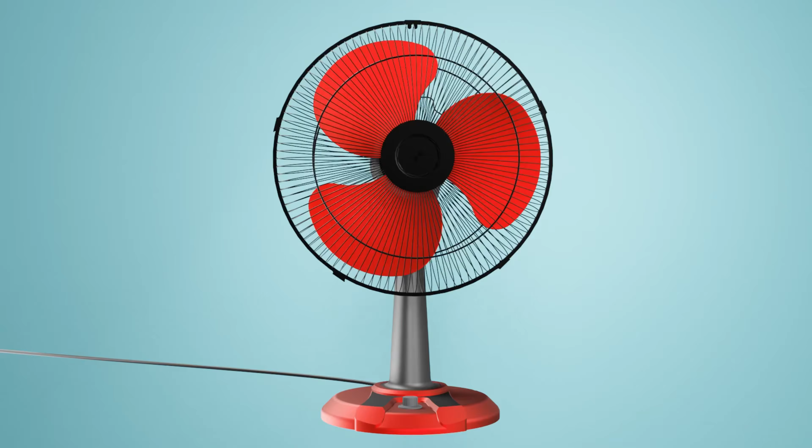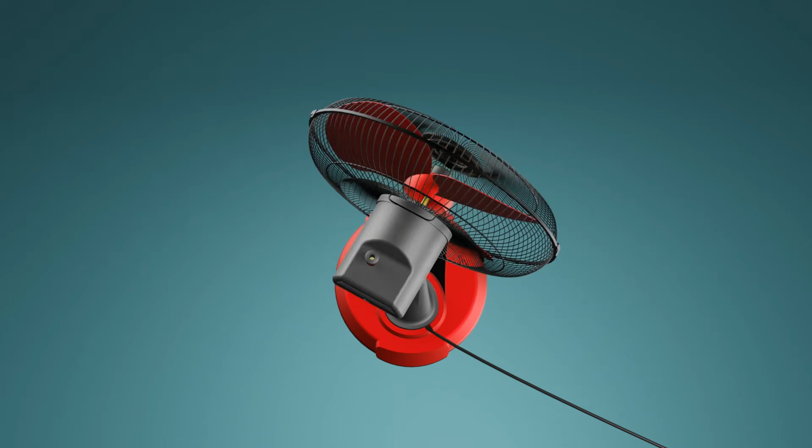Every household has a fan that rotates its head from side to side on a fixed base to distribute air across a wider area. Unlike stationary fans that blow air in a single fixed direction, oscillating models typically sweep through an arc, often 75 degrees to 90 degrees, to create more uniform airflow throughout a room.

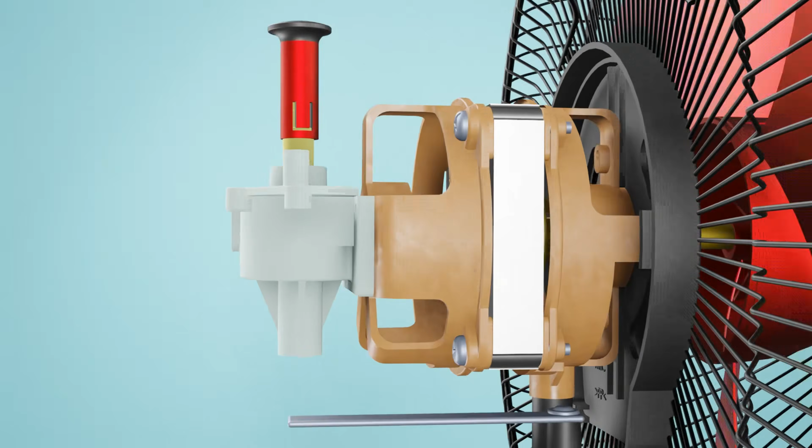An oscillating fan uses a single motor to both spin the blades and drive a side-to-side sweeping motion through a series of mechanical reductions. The main motor shaft has a spiral thread called a worm, located behind the fan blades. As the motor spins at high speed, this worm rotates with it, engaging a perpendicular worm gear inside a gearbox, the clutch mechanism known as the pull pin.

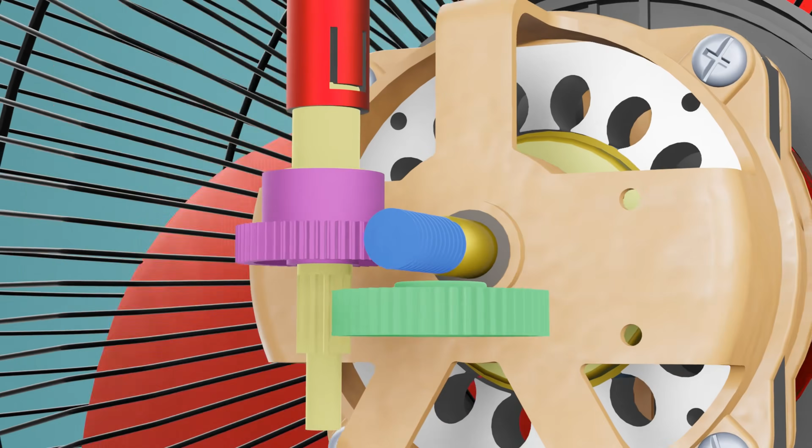When you press the oscillation pin down, you engage a secondary set of gears. This works in two states. Lock state: pressing the pin allows a spring-loaded mechanism, often using small ball bearings, to lock the worm gear's rotation to a central axle. Free state: pulling the pin up disengages these gears, allowing the motor to spin the blades without turning the oscillation machinery.

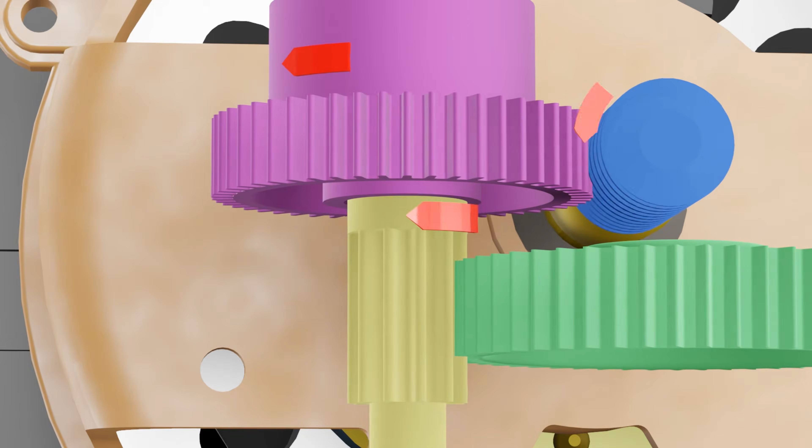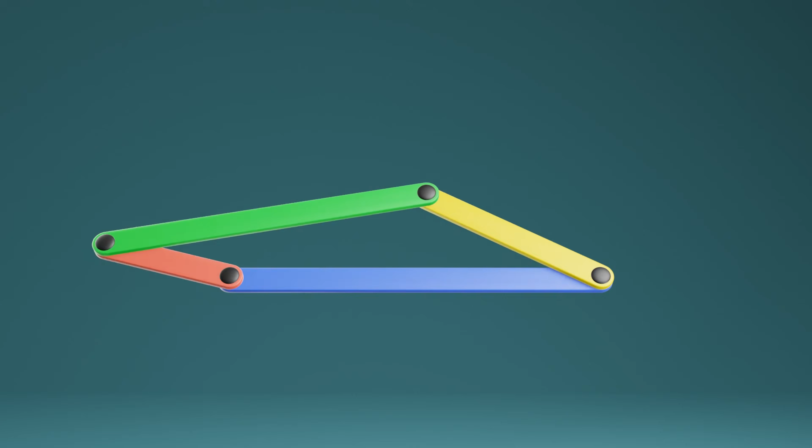This pull pin passes the motion through another set of gears to slow it down further. The goal is to take the motor's high-speed rotation and turn it into a very slow rotation of a final crank wheel, typically only a few revolutions per minute. The gear spins, but the back and forth motion of the fan is achieved through a mechanism called the 4-bar linkage. A 4-bar linkage is the simplest and most common way to transform motion in machinery.

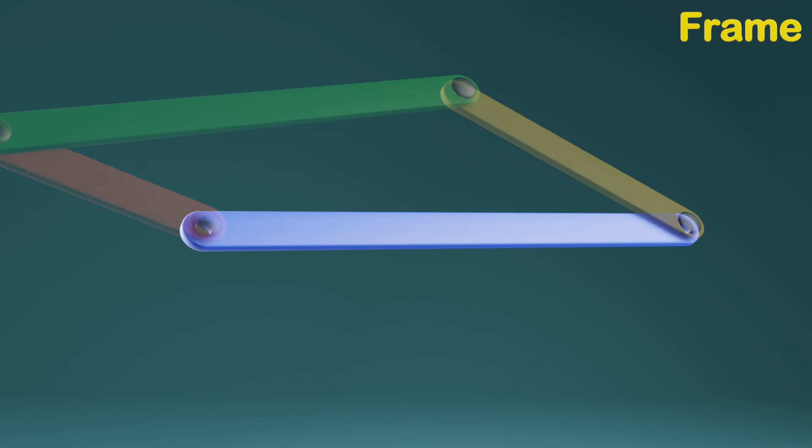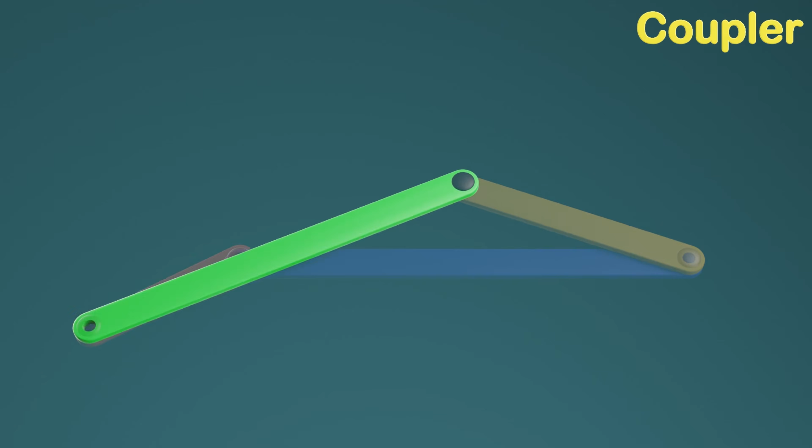It consists of 4 rigid bars, connected in a loop by 4 joints, typically allowing for 1 degree of freedom motion, meaning moving just one bar forces all others to follow a predictable path. The 4 key parts are: frame, the base of the machine that stays stationary; crank, the link that can rotate a full 360 degrees, usually the input connected to a motor; rocker, a link that only swings back and forth like a pendulum rather than making a full circle; coupler, the floating link that connects the crank to the rocker, transmitting motion across the gap.

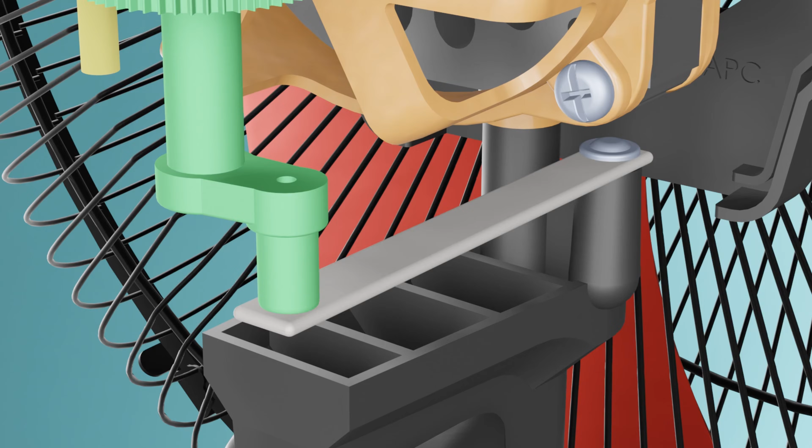The same mechanism works in the fan as well. In the fan, the final rotating gear is connected to a crank arm, which is part of a 4-bar mechanism. Crank, a short metal bar attached to the rotating gear. Connecting rod, a longer bar attached to the crank at one end, and a fixed point on the fan's base at the other. As the crank makes a full circle, the rod pushes and pulls the entire fan head.

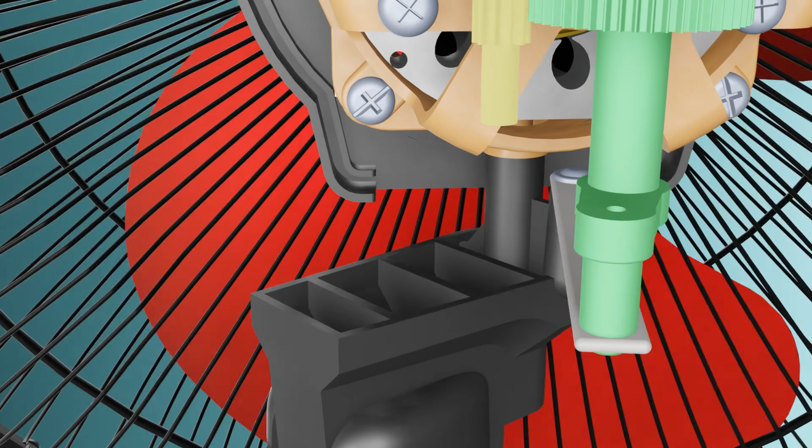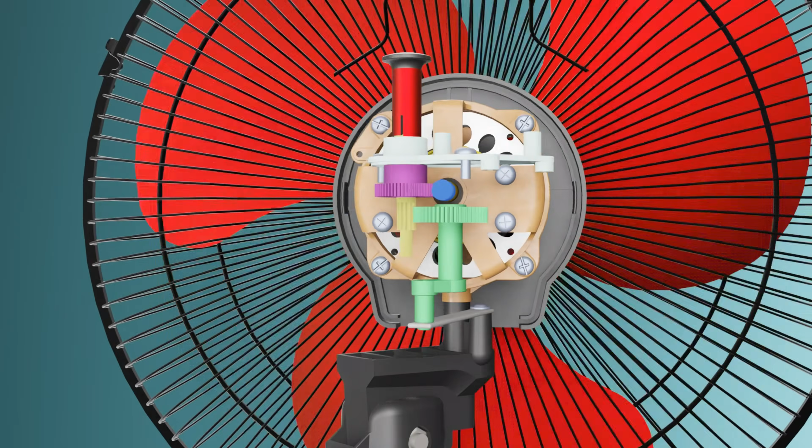Because the rod is anchored to the stationary base, the fan head is forced to pivot back and forth on its neck. Finally, this setup converts continuous circular motion into reciprocating angular motion. The length of the crank arm determines the sweep angle, usually between 60 degrees and 120 degrees, defining how far the fan oscillates from side to side.